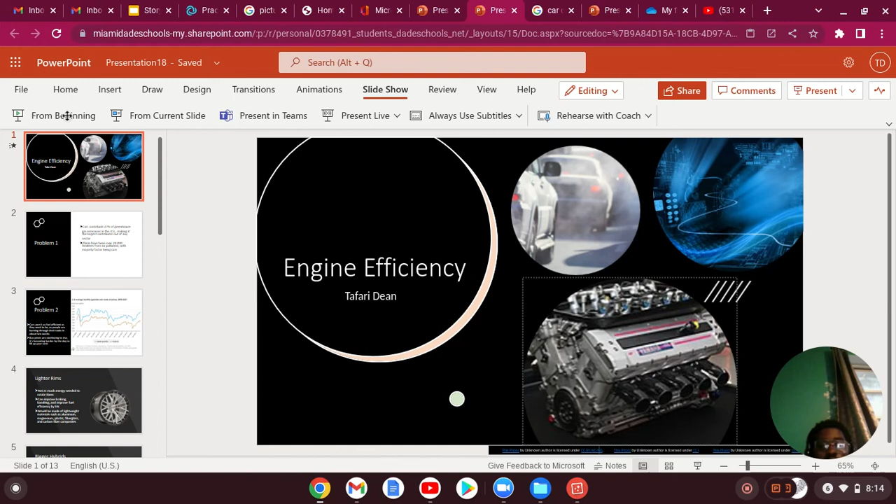Good afternoon. My name is Tafari Dean, and I will be talking about various ways to improve engine efficiency.

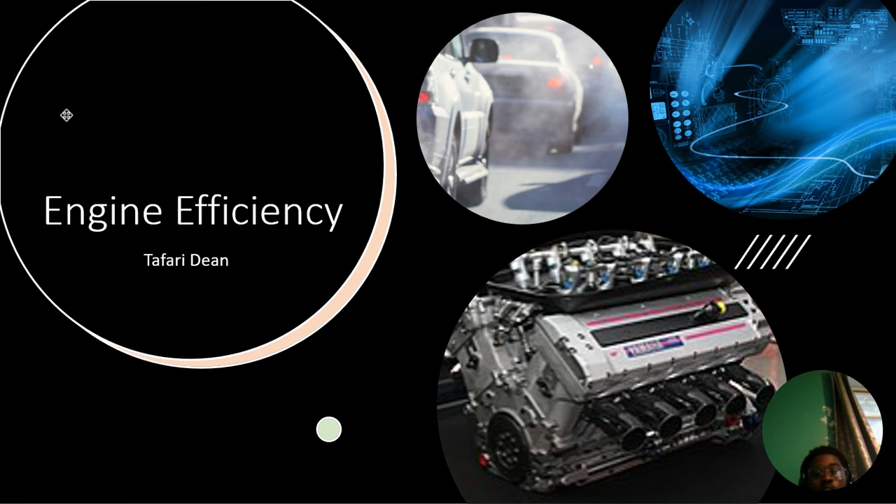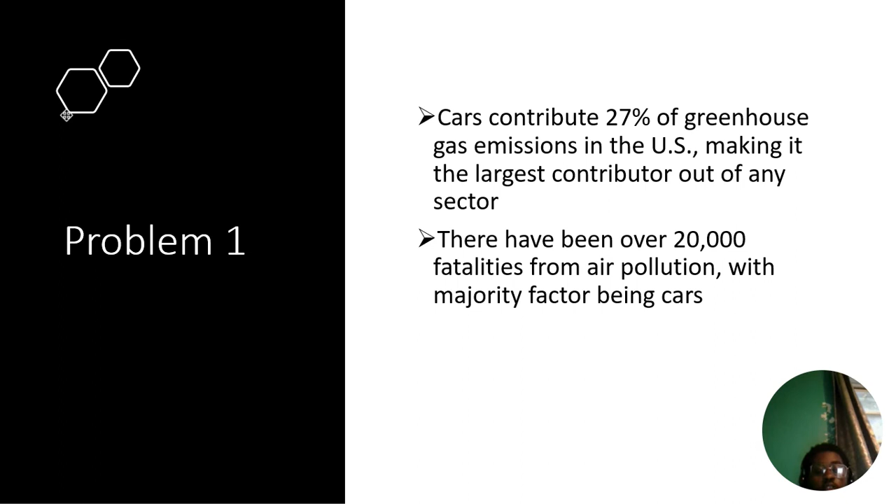My first problem: cars are the largest contributing factor to greenhouse gases over any other sector, and they are the major causes of death by air pollution annually. Second problem: cars aren't as efficient as they need to be, as people are burning through their tanks in about 2 weeks. And as gas prices continue to rise, it becomes harder by the day to fill up your tank.

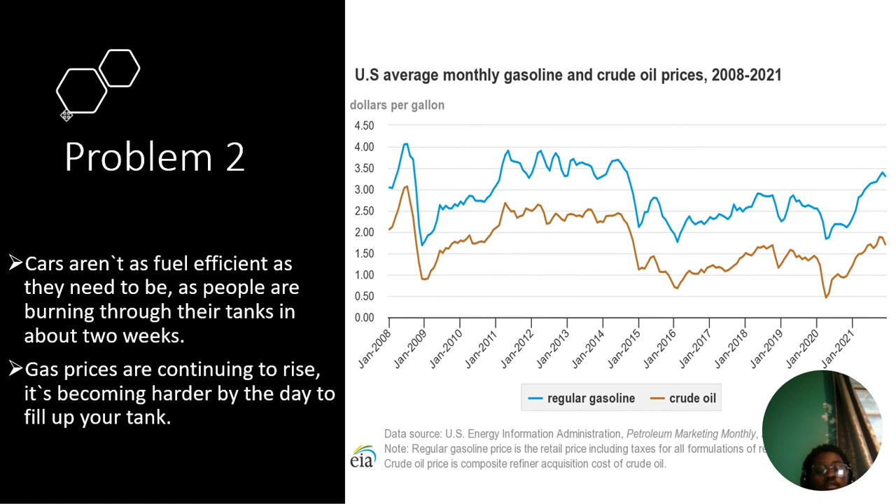The first solution was lighter wheels. Not only is there less inertia from them, making them lighter can improve braking, give better handling, and, shown by a study from TireRack.com, can improve fuel efficiency on the freeway by 5%, as well as on city streets with a constant acceleration and deceleration. These wheels will be made of materials such as aluminum, magnesium, plastic, fiberglass, and carbon fiber.

Another thing will be bigger wheels. Moving away from 18-inch wheels to 20 to 21-inch wheels would also increase fuel efficiency, as there's more rotational speed with bigger wheels. Although they wouldn't get up to speed as fast as 18-inch wheels, since they would technically be heavier, they would require less energy to keep them at cruising speed. Also, these wheels in particular are forged alloy wheels that not only are they lighter and stronger than the traditional steel or cast iron wheels, they are also more durable, although they are a bit expensive.

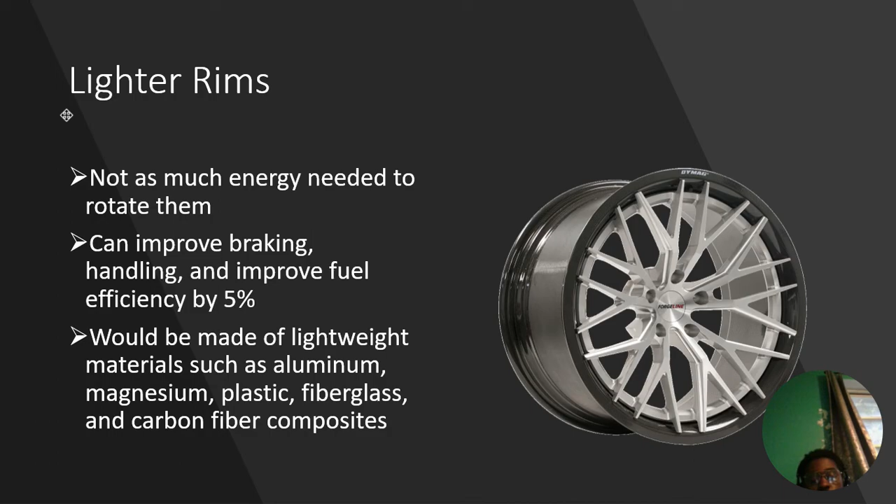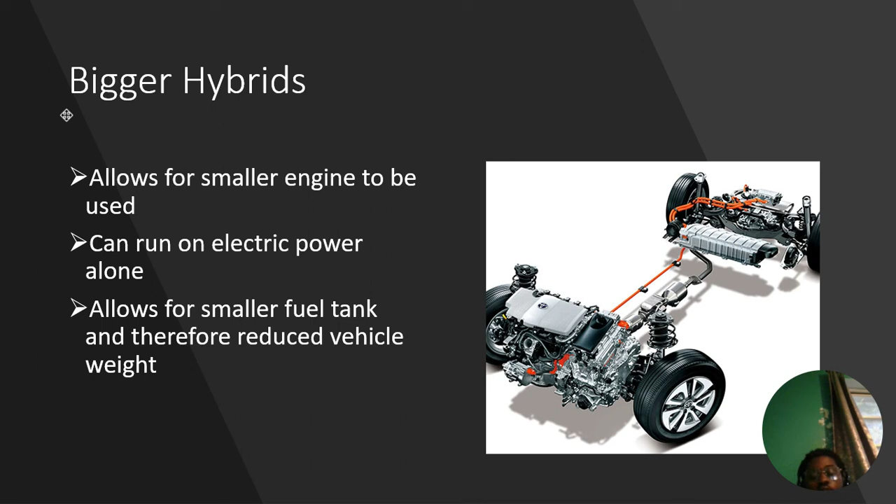The next would be reducing vehicle weight. The lighter the vehicle, the less energy it needs to get moving. Removing weight also decreases the vehicle's rolling resistance, which is a force that resists forward motion produced as the wheels move forward. Reducing a vehicle's weight, even by 10%, can improve the fuel economy by 6 to 8%.

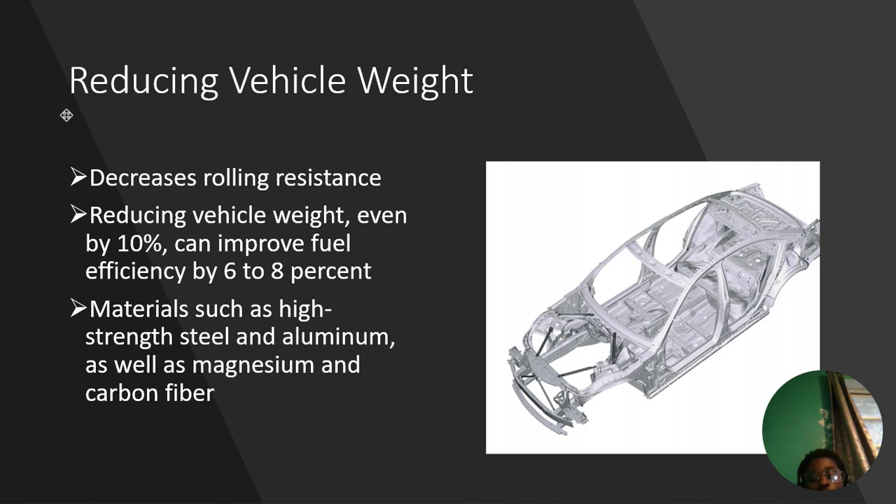Using materials such as high strength steel and aluminum, and even other materials such as magnesium and carbon fiber composites, could greatly reduce the vehicle's weight and improve fuel efficiency. Using these materials would also decrease component weight by 75%. But everything does come with its flaws, as carbon fiber and magnesium aren't that easy to join with other materials and they're quite expensive. The last thing would be the MGUH.

The MGUH, or a motor generating unit, collects heat from the turbo to produce electricity and even power when operating at low speeds. Motor assistance permits better combustion, reduces exhaust emissions, improves torque response and torque boost, and this would work with towing vehicles and such. And at high speeds, it would improve efficiency by producing electric power, which in turn puts less stress on the engine and would lower the wear and tear of the engine as well.

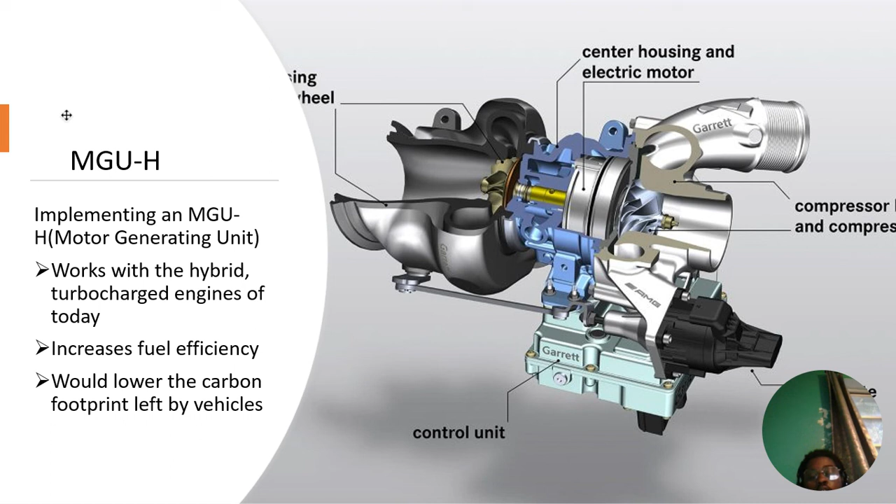The turbine housing and turbine wheel. The turbine can generate energy the same way a wind turbine can. It takes heat from the turbo and converts it into energy. Center housing and electric motor as well as control unit. The center housing puts the exhaust gas from the engine to work.

Not only are those gases going to spool the turbo as a regular one does, those gases are going to the motor, harvesting energy then later put back into the turbo, which eradicates turbo lag as well as getting extra torque at low end speeds. Again, as I alluded to earlier, this will help with towing vehicles. And the control unit. The control unit controls the speed of the turbine, preventing it from overspeeding, and regulates the speed of the compressor as well.

The compressor housing and compressor wheel. The compressor wheel characterizes airflow and turbo efficiency. It brings in air through a filter, compresses said air, which in turn increases the air pressure, which is then sent through the wheel and compressor housing.

The wastegate actuator. This controls the speed of the turbine, preventing it from overspeeding and regulating the speed of the compressor. Ultimately, this helps to protect the turbocharger from unnecessary wear and tear by capping the maximum boost pressure of the turbo at a safe level.

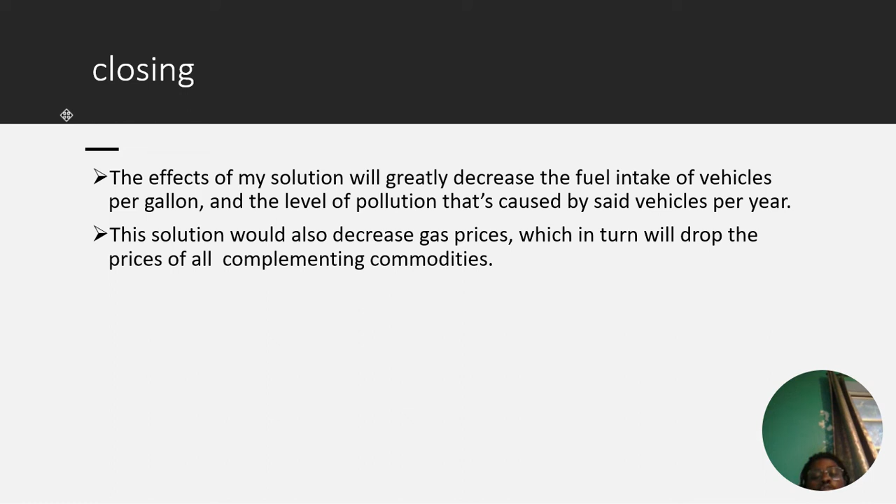Closing. Hopefully, the effects of the solution will greatly decrease the fuel intake of vehicles per gallon and the level of pollution that's caused by said vehicles per year. Hopefully, this solution will also decrease gas prices, which in turn will drop the prices for all complementing commodities. Here are my resources, and thank you for listening.